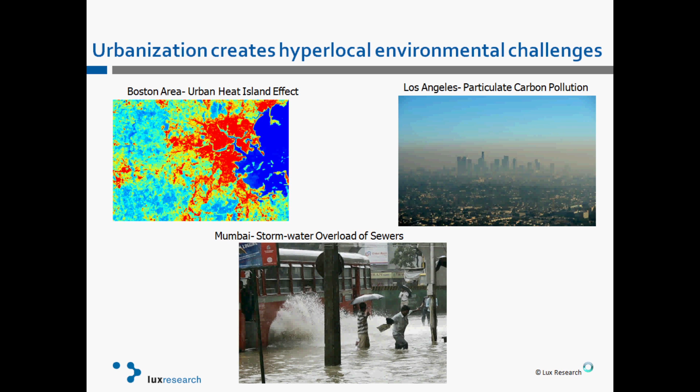Building integrated vegetation has moved beyond being looked at as another way to increase livability or urban green space. Now cities are looking at it as a means of mitigating some very specific hyperlocal environmental challenges, some of which I pointed out in the last slide.

So how do we define building integrated vegetation? Lux Research has taken a careful look at all the different technologies that involve vegetation in urban areas and buildings, and come up with this term, building integrated vegetation, which includes any exterior or interior building material that incorporates vegetation for aesthetic, environmental, energy efficiency, or food security purposes.

The most commercially dominant of these are green roofs, and a schematic layered structure of an extensive green roof is seen in the left-hand corner. In the right-hand corner is a green wall, or vegetated wall. And the bottom shows a vertical greenhouse in a double skin facade.

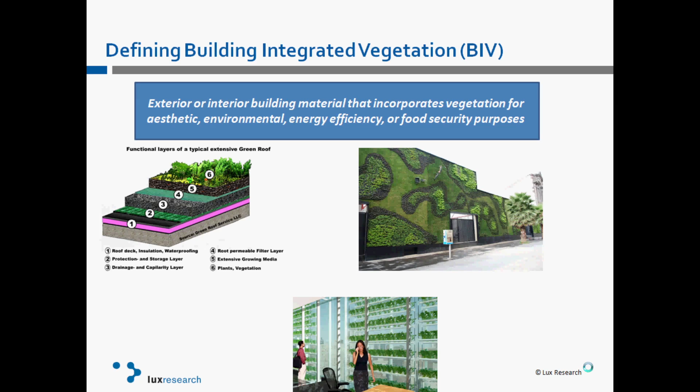So I alluded to the fact that green roofs and walls have certain benefits that help mitigate some of these environmental challenges. Now, are these quantifiable? I'm going to list some of them.

Number one is thermal insulation. Green roofs and walls reduce the solar heat gain via shading, as well as add thermal mass. Some of the measurements we have observed are from a study by National Research Council in Canada, and they reported a reduction in air conditioning energy demand from 7 to 1.5 kilowatt hours per day, and this is pretty significant.

They started with a roof with standard polyolefin roofing membrane and expanded polystyrene, and after the green roof retrofitting, they observed nearly 66% reduction in the cooling energy demand, and most importantly, this was during the peak demand time. So the economic benefit would be even greater in geographies with a tiered pricing structure.

One major barrier to demonstrating this value is the reliance on steady-state R-value by designers and architects. Without in-field data or very good modeling simulations, the conventional designing parameters will underestimate this value.

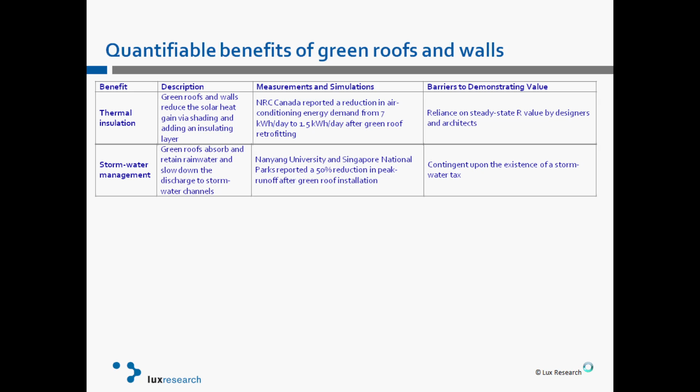Stormwater management. This has been a big driver for green roofs, and a study from Nanyang University in Singapore reports 50% reduction in peak runoff. So the economic value is really contingent upon the existence of a stormwater tax and any benefits that the building owner might have by installing a green roof.

Carbon fixing. Like any other photosynthetic organism, green roofs and walls absorb carbon dioxide and convert it to oxygen and glucose. The economic payback here is contingent upon the existence of a carbon price.

After three benefits that are quantifiable in terms of economic payback, let's talk about two other benefits that are not. The first of these is removal of airborne pollutants such as nitrous oxide, sulfur oxide, and particulate carbon from ambient air. Green roofs, and even more than green roofs, green walls have a significant benefit in removing NOx and particulate matter.

However, the economic benefit is not obvious. This is highly dependent on city level regulations to address ambient air pollution. So building codes in cities like London and Copenhagen are trying to mandate it, and that may drive the adoption of green roofs and green walls.

And the last benefit is acoustic insulation, pretty significant, reduction of sound by 8 to 18 decibel levels. However, there is no economic benefit. This is a nice to have for most building owners, and it really doesn't affect the bottom line.

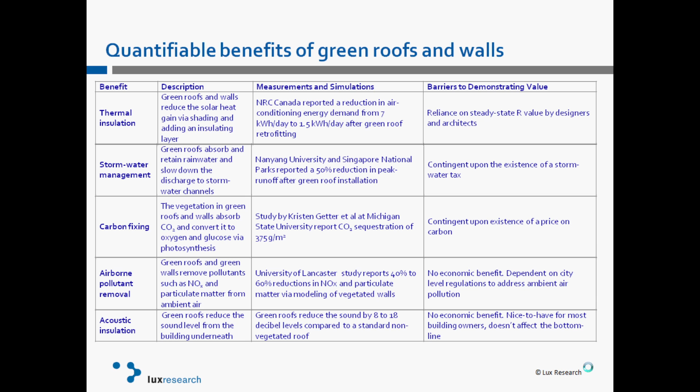So it's probably obvious to you by now that these value propositions are disaggregated. Unless they're taken together, it's difficult to justify very expensive green roofs or green walls.

Let's take mitigation of urban heat island, for example. Green roofs and cool roofs both result in cooling energy savings, comparable performance, but cool roofs are significantly less expensive, by an order of magnitude in some cases.

Let's look at stormwater management. Why would somebody spend $4,000 for a green roof when they can buy a 53-gallon rainwater harvesting tank for 10% of that price?

Air pollution removal. Green walls are very, very expensive, but photocatalytic coatings can have comparable performance at a fraction of that cost. Green walls are, of course, far superior in removing particulate matter from air, and this is where photocatalytic coatings are not so useful.

So when looking at these benefits individually, it's apparent that a building owner would go for these alternative technologies and not building integrated vegetation. So really these technologies are driven by thought leaders, city governments who really appreciate all these different value propositions and are driving it via various supportive policy measures.

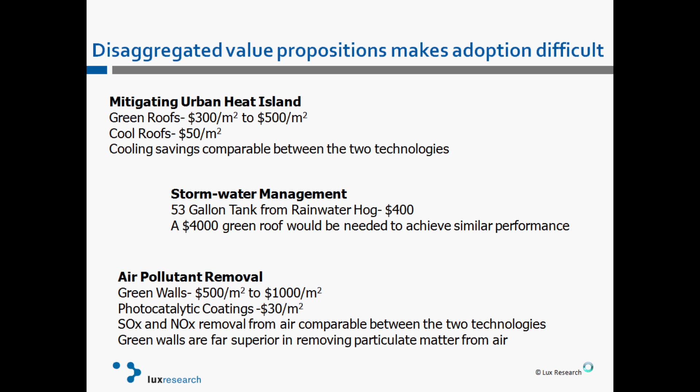Who are these thought leader cities? We have identified 63 cities all over the world: 15 of them in North America, 2 of them in South America, 25 of them in Europe, and the rest of them in Asia Pacific.

Few examples: Portland, Oregon has a very attractive cash rebate program, up to $54 per square meter. This forms 10% or more of the installed cost for green roofs.

London, in addition to a discussion of including green roofs in the building code for air pollution removal, there is a significant stormwater tax reduction already in place.

Copenhagen has announced a green roof mandate in 2009 where all buildings above 1,000 square meter floor space have to have a green roof.

Sydney: green roofs and green walls, buildings that have those receive significant exemptions from city development levy.

Tokyo, again, there is a green roof mandate for buildings above a certain floor space.

Beijing has announced very ambitious targets. They would like to install green roofs on 30% of the flat rooftops by 2030.

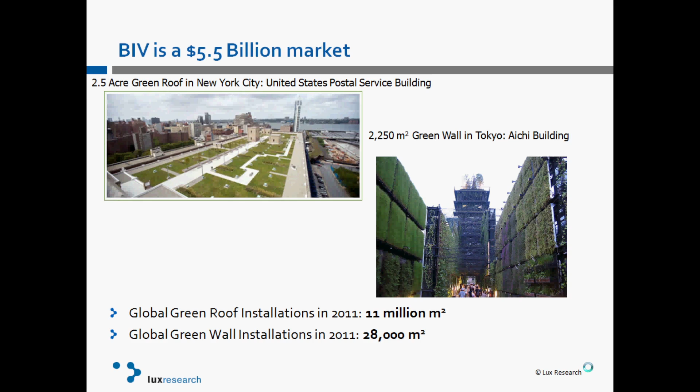As a result, some of the pioneering companies like Xero Flor, Sempergreen, and ZinCo have grown in size over the past 2 decades.

The revenues for Semper Green USA alone is $5 million per year. Xero Flor has, since 2002, installed 2.5 million square feet of green roofs all over the world.

Large building materials players have taken notice of this success, and they are entering the building integrated vegetation marketplace. Some have taken the approach of supplying components.

Sika Sarnafil supplies waterproofing membranes, root barrier membranes, and drainage layers, while some other firms have taken the approach of building the systems themselves. SkyScape vegetative roof systems from Firestone Building Products is an example of the second approach.

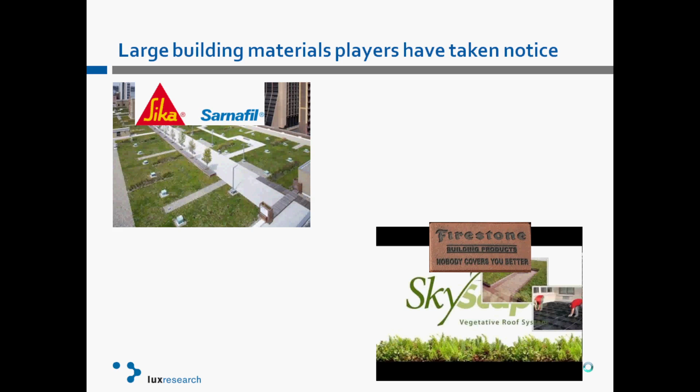This system is invented by Serra Casa Ceramica, a Spanish company. The idea here is to combine the air pollution removal capabilities of photocatalytic coatings at a significantly low price compared to vegetated walls.

And to use the byproducts of the photocatalysis, namely nitrates and sulfates, as fertilizers for the vegetation. So you're reducing the cost and reducing the problem of these nitrates and sulfates going into the groundwater.

Another innovative design that also comes from Spain is combining a low carbon cement technology using magnesium phosphate with a living facade. The interesting thing is the magnesium phosphate, in addition to absorbing carbon dioxide, also has pH and surface roughness such that it increases the growth of microalgae, lichen, and moss.

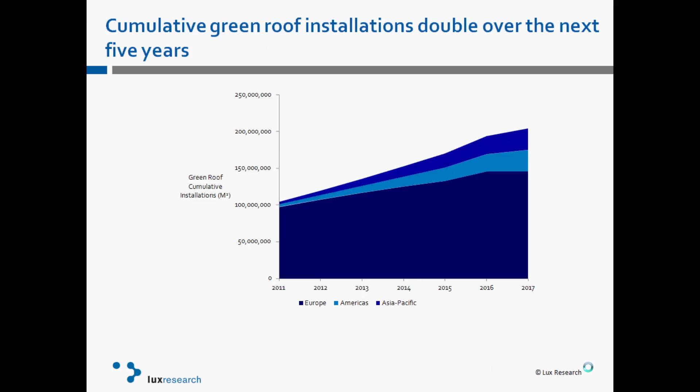When we look a little more deeply and look at new installations, we realize that the market as a whole is slowing. So new installations will peak to about 16 million meter squares by 2012 and stay between 16 to 18 million meter squares by 2017.

And the green roof market size in dollars again shows a similar trend, with the annual market size actually reducing a little bit between 2015 and 2017 because of the cost reductions in green roof systems we are forecasting.

But what if we look into each of the three regions we are looking at, Europe, Americas, and Asia Pacific? Is the picture the same or different?

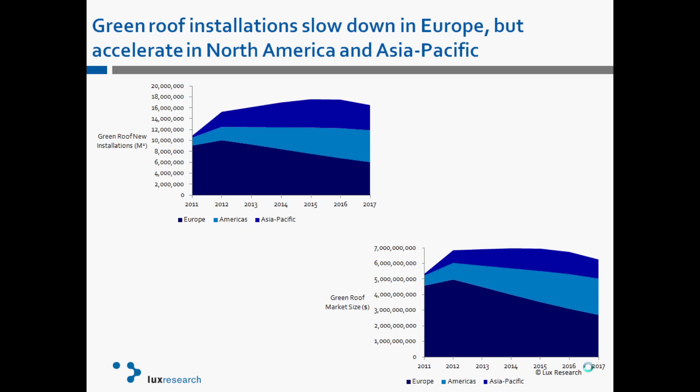In Europe, we predict a significant slowdown. This is mainly due to the markets in Germany and Switzerland, which we believe are close to saturation point, and the slow rate of new construction is not helping either.

So unless new cities come on board, like Stockholm or Zurich or Malmo, we are pretty much looking at a flat market in Europe. And if the macroeconomic environment worsens, if the Eurozone breaks, then we could be looking at an even more serious situation in the European market.

And let me repeat this, because over the last 2 decades, the European market has really driven building integrated vegetation. But we believe it's time for a paradigm shift. The market is moving from Europe to North America and Asia Pacific, and companies must adjust their entry strategies accordingly.

The Americas: coastal cities in the US and Canada are going to propel green roof installations to 5.7 million meter squares by 2017. So cities like New York, Washington D.C., Toronto, Vancouver, Chicago, and some newer ones like Bogota, Colombia, should see significant growth.

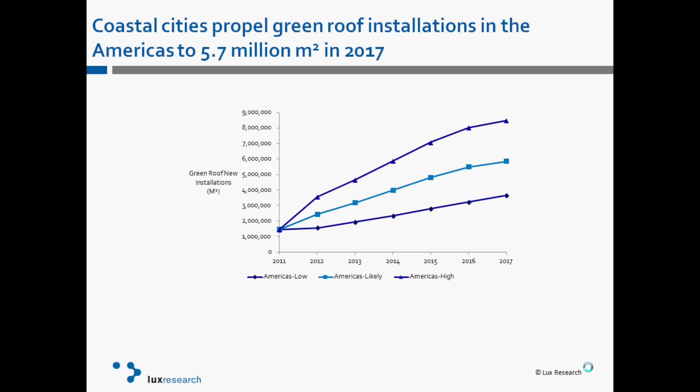Asia Pacific: the growth is going to be driven by Shanghai, Tokyo, and Singapore. Assuming no new cities come on board, we are predicting 4.7 million meter squares by 2017.

Now, looking at the typical adoption cycle of 2 to 3 years, if you're not in Asia already, it's probably too late to enter these cities.

But there may be newer cities like Kuala Lumpur, Mumbai, or Osaka, and if they come on board, then we are looking at a market size of 7 million meter squares in 2017.

So we would urge the companies who are listening to this, if they're interested in Asia Pacific, to look at these newer cities.

Green walls. This is a very, very nascent niche right now, but slated to grow 16 times over the next 5 years. So we're looking at cumulative installations of 4 million meter squares by 2017.

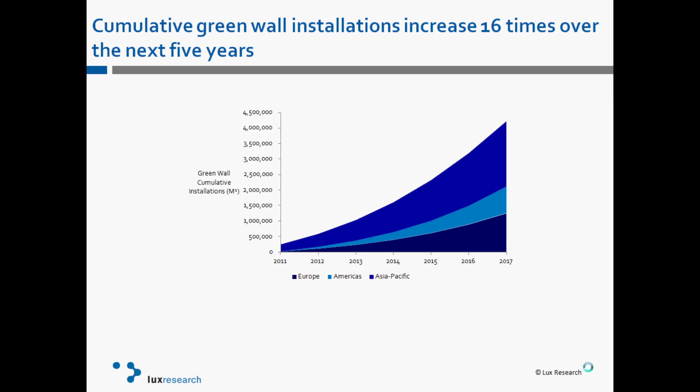And the growth is there across all the regions, Europe, Americas, Asia Pacific, they're all growing. And right now there exists a great variety in terms of the types of green walls and the types of suppliers. So if you're interested in entering the green wall market, the time is ripe.

The next 5 years should see more consolidation and a reduction in the number of players and the number of designs. So the time to enter and become an incumbent is now.

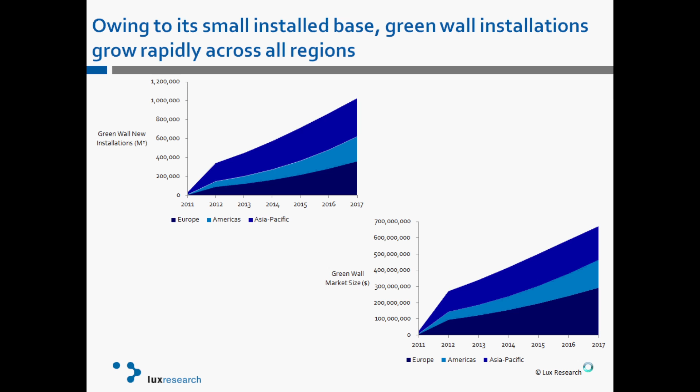So what do we recommend to different types of stakeholders in the value chain? We recommend that building material suppliers should find credible system integrators to supply when entering a new city or country. You should really have the mindset of a sniper rather than a carpet bomber, because these markets are driven by individual cities with hyperlocal challenges.

So you must find system integrators or customers who are strong with established channels in those individual cities. So far, the choice of vegetation has not been sophisticated, but we recommend that makers of vegetated mats and blankets should determine the best vegetation for each value proposition. It's obvious that air pollutant removal, thermal insulation, stormwater retention—each of those individual value propositions will have a certain type of vegetation suitable for those purposes.

We recommend that the city should clarify their priorities for promoting building integrated vegetation and tie them to these specific performance metrics. And system integrators, architects, and design firms should focus on more in-field performance data, better estimates on economic payback, and better modeling capabilities in the absence of in-field measurements. As this market becomes mainstream, the economic metrics are going to become important, whereas up till now they have not been.

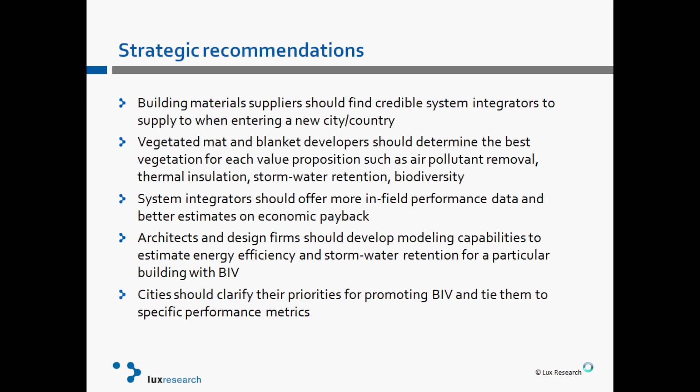So we really see the market shifting from Europe to the Americas and Asia Pacific over the next 5 years or so. And we predict that building materials companies are going to move away from just repurposing standard roofing membranes and drainage fabrics, to developing special grades and waterproof membranes and geosynthetic fabrics with multifunctional capabilities, specifically designed for BIV.

We also predict that the design paradigm for BIV is going to shift from a carefully cultivated garden to a meadow that doesn't require very much irrigation or weeding support. This should result in significantly reduced costs, further propelling BIV into the mainstream. And finally, we will see BIV technologies increasingly integrate with other innovative building materials like photocatalytic coatings or solar panels.

So building integrated vegetation is at a very interesting turning point, where there are shifts in the geography as well as shifts in design. The companies who are able to navigate both these changes successfully will thrive in this atmosphere.